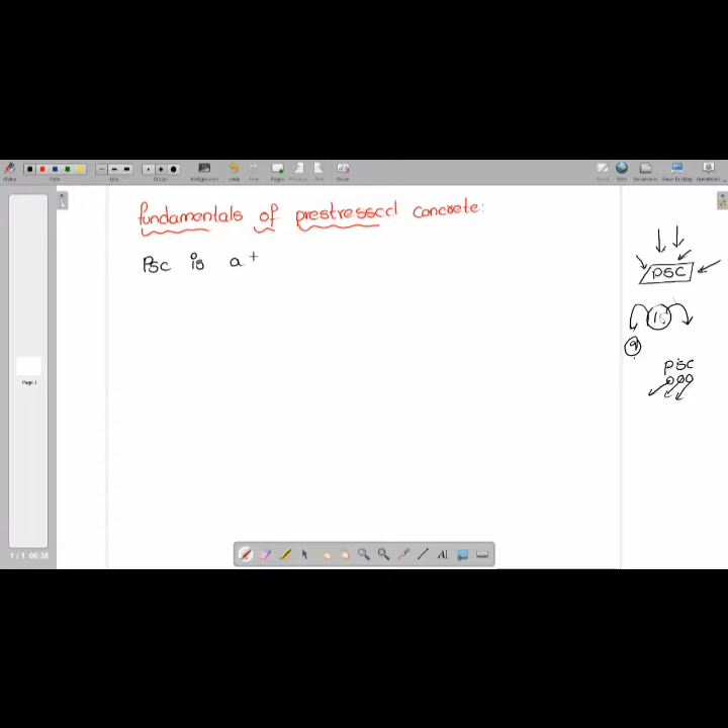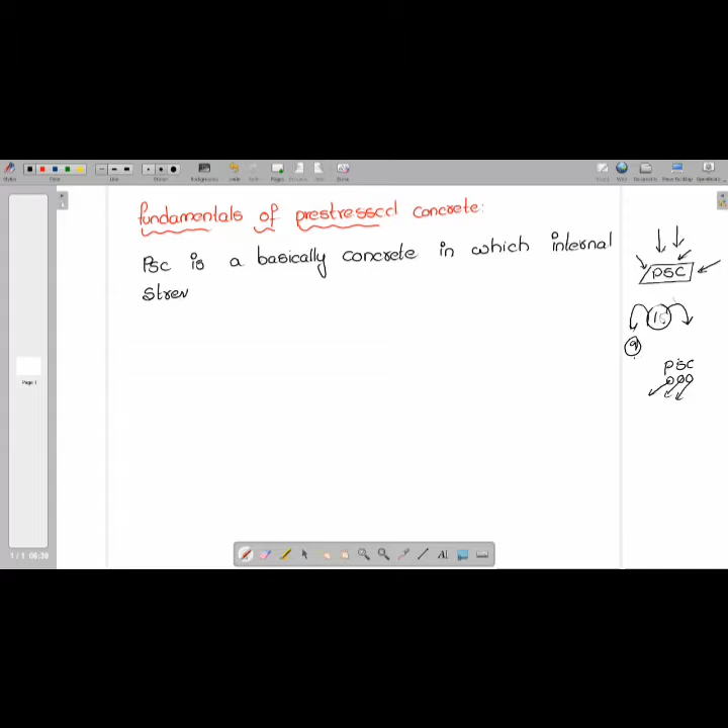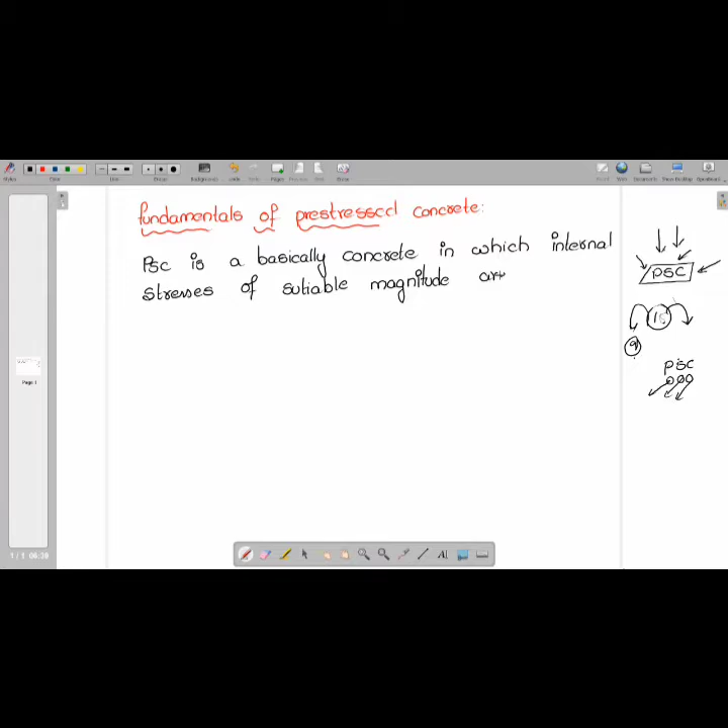Are you clear, students? So what is pre-stressed concrete? PSC means pre-stressed concrete. Pre-stressed concrete is basically a concrete in which internal stresses of suitable magnitude are intentionally introduced.

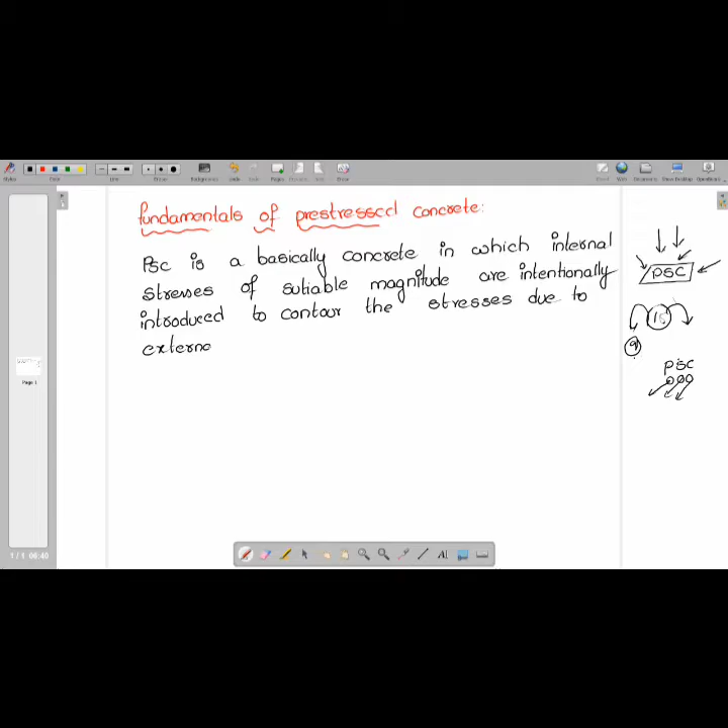To counter the stresses due to external loads, up to a desired extent. Is this clear, my dear students? So what I would like to tell you is: pre-stressed concrete is basically a concrete in which internal stresses of suitable magnitude are intentionally introduced to counter the stresses due to external load up to a desired extent.

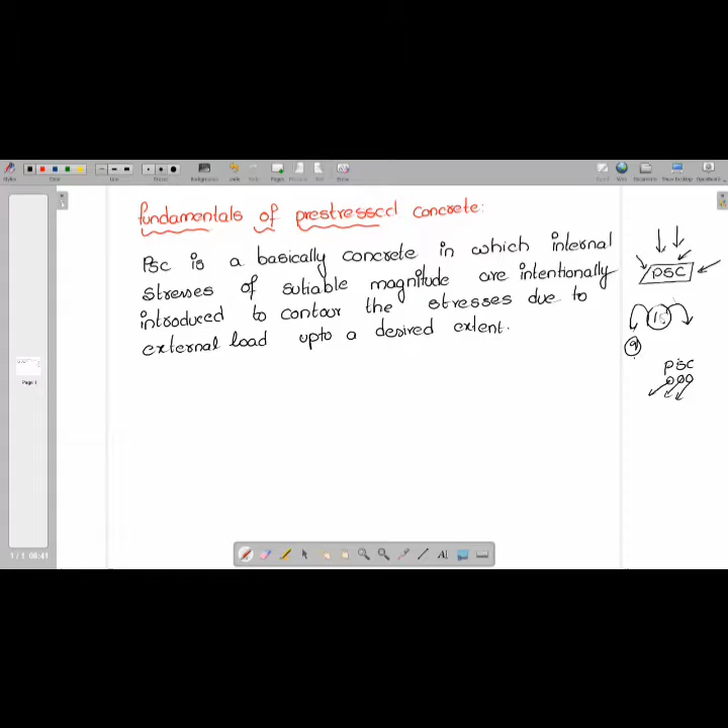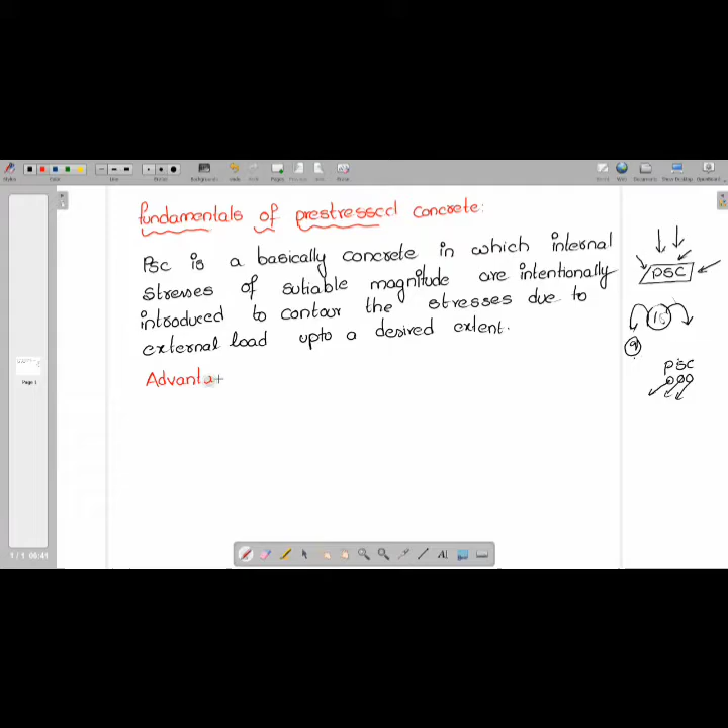Okay, suppose, students, in RCC steel plays a passive role, but in pre-stressed concrete, now immediately you will ask me. First of all, we'll discuss what are the advantages of pre-stressed concrete.

What are the advantages of pre-stressed concrete, sir? The first advantage of pre-stressed concrete is: cross section is more efficiently used in fully pre-stressed members.

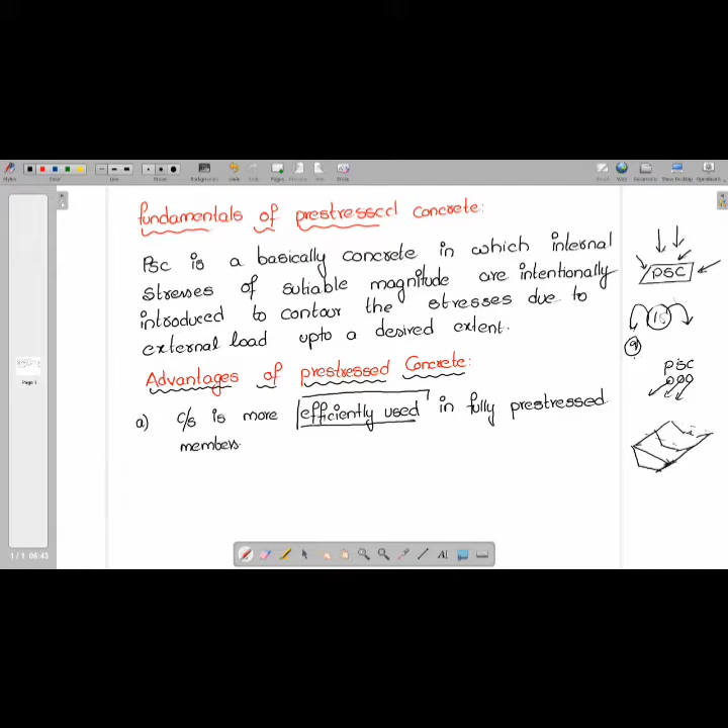I'll tell you how it is. Suppose you want to go on a bridge. The length of the bridge is fixed, so whatever the girder length, you stick to that length only. That is the reason the cross section is more efficiently used here. Suppose this is what you have to provide, but instead, if you provide up to this, then what will happen? Obviously, load will increase.

So when you are using efficient section, dead loads will also be reduced considerably. Dead loads are reduced considerably.

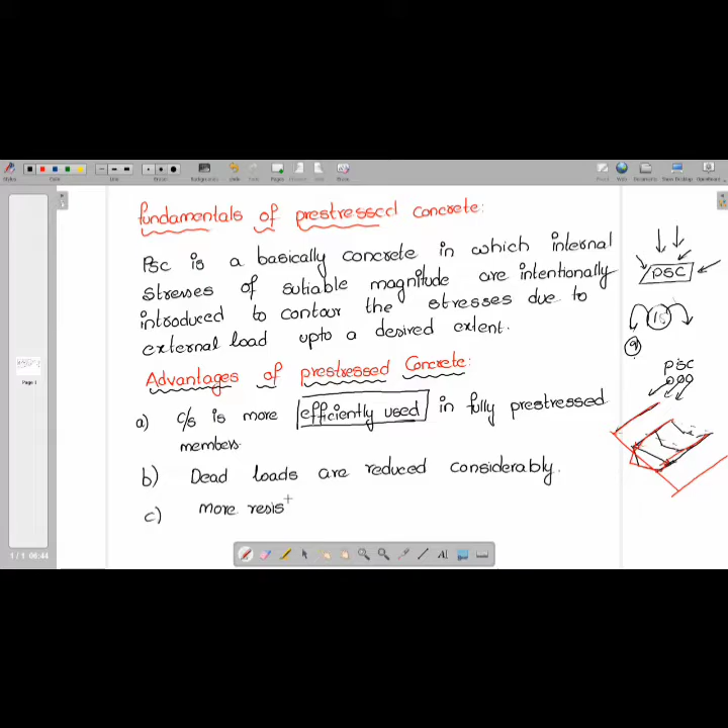Pre-stressed concrete is more resistant to impact and vibrational loading.

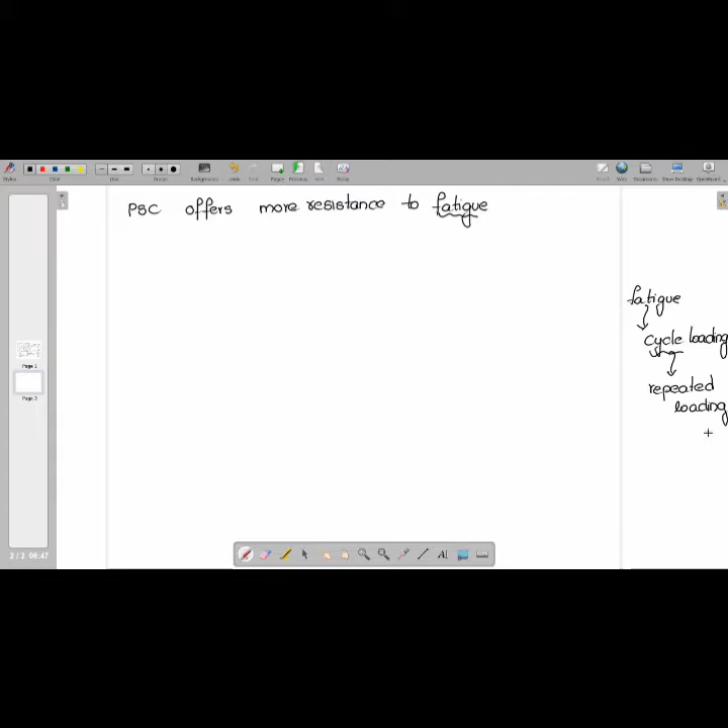So pre-stressed concrete offers more resistance to fatigue or repeated loading. In case of cyclic or repeated loading, if there is a generator in a cellar, then it is called repeated loading. Any machine loading is nothing but a repeated loading. Clear, students?

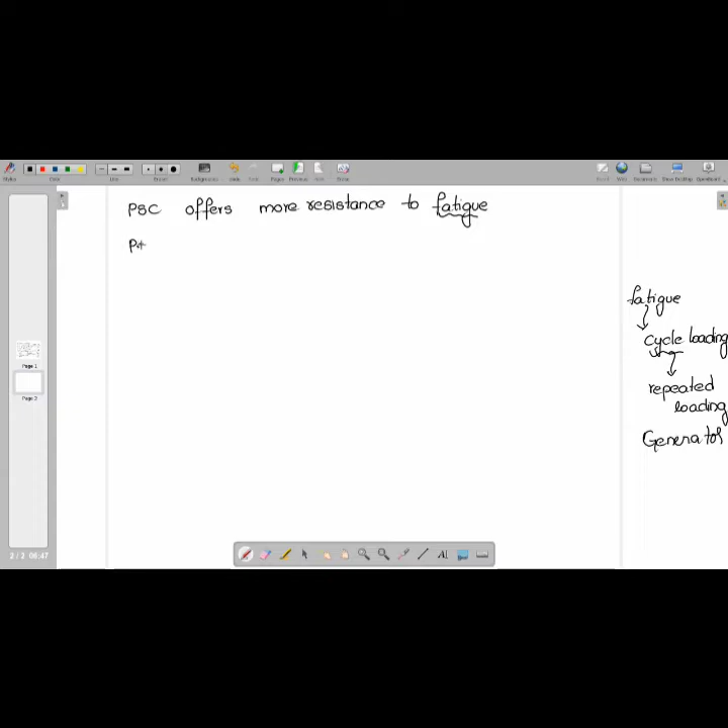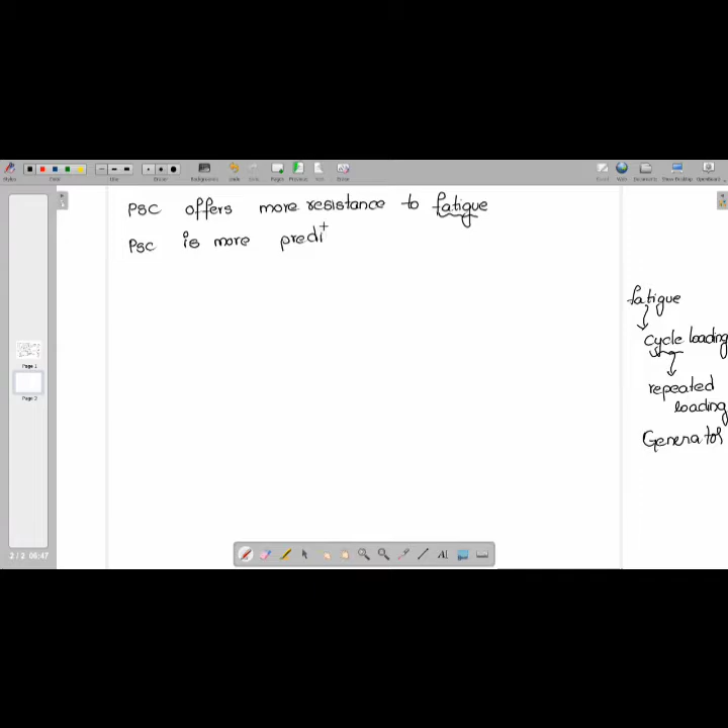Is it clear? Next one: pre-stressed concrete is more predictable, meaning when it is going to fail or show any sign of failure, pre-stressed concrete is more predictable compared to reinforced cement concrete (RCC).

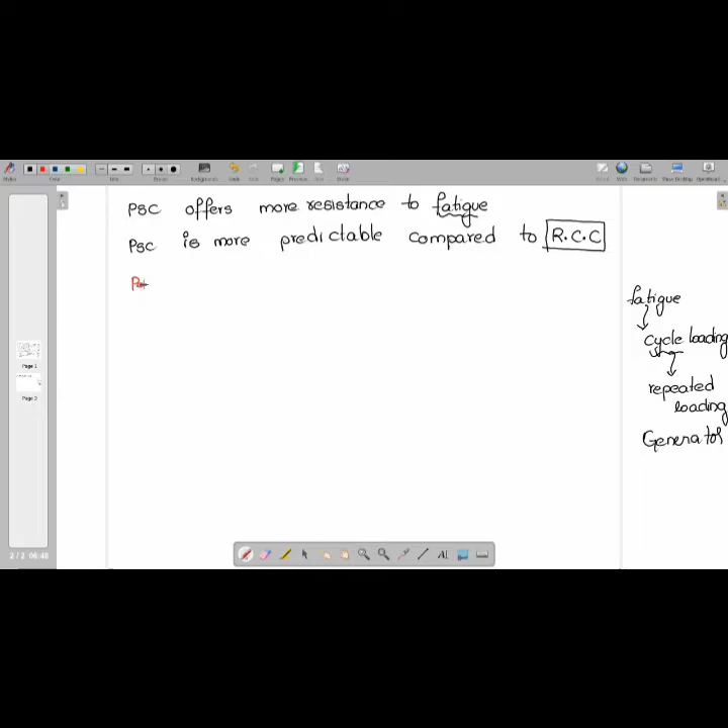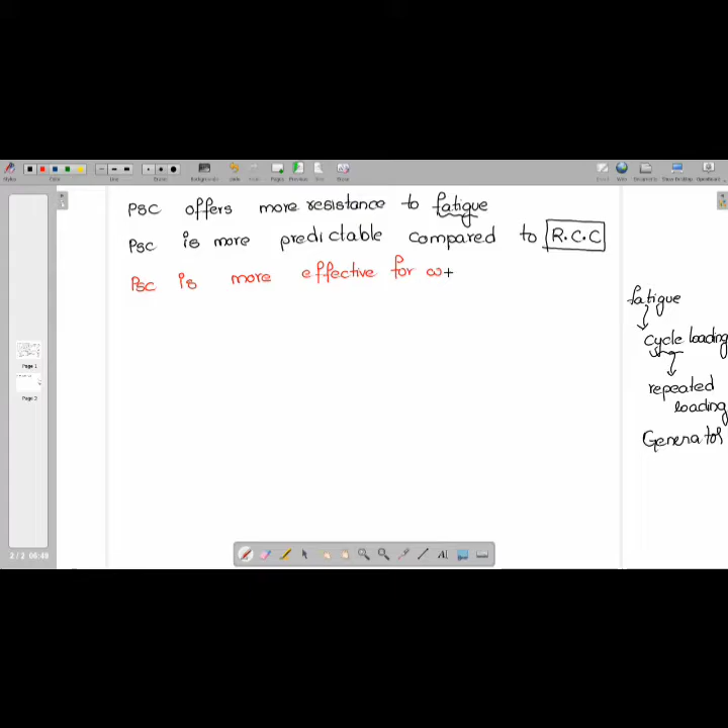And remember, students, pre-stressed concrete is most effective in water retaining structures. Water retaining structures mean hydraulic dams, circular water tanks, or any hydraulic structures. Pre-stressed concrete is more effective for water retaining structures.

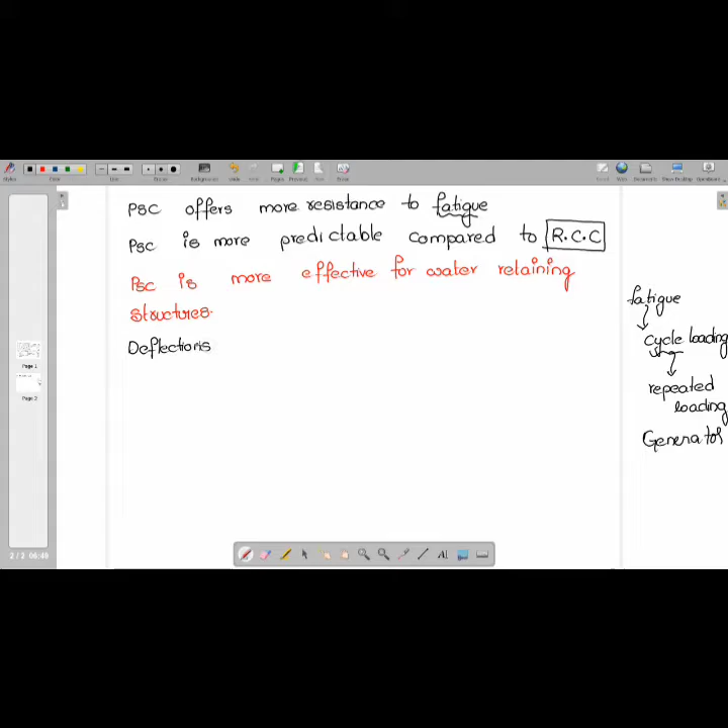And remember, deflections are less in pre-stressed concrete. It is more effective for water retaining structures, and deflections are less. Hence it is more stiffer.

So what are the advantages of pre-stressed concrete? The cross section is most efficiently used. Dead loads are reduced considerably. It offers more resistance to impact and vibration loading. It has more resistance to fatigue loading. Pre-stressed concrete is more predictable compared to RCC. It is more effective for water retaining structures, and deflections are less in pre-stressed concrete.

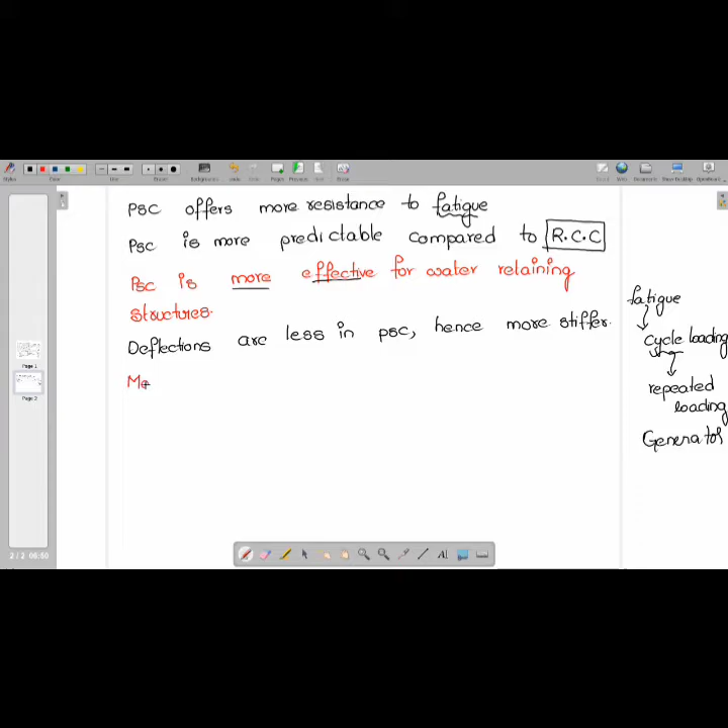Okay, now what are the materials used in pre-stressed concrete? Sir, see, the materials used in pre-stressed concrete are...

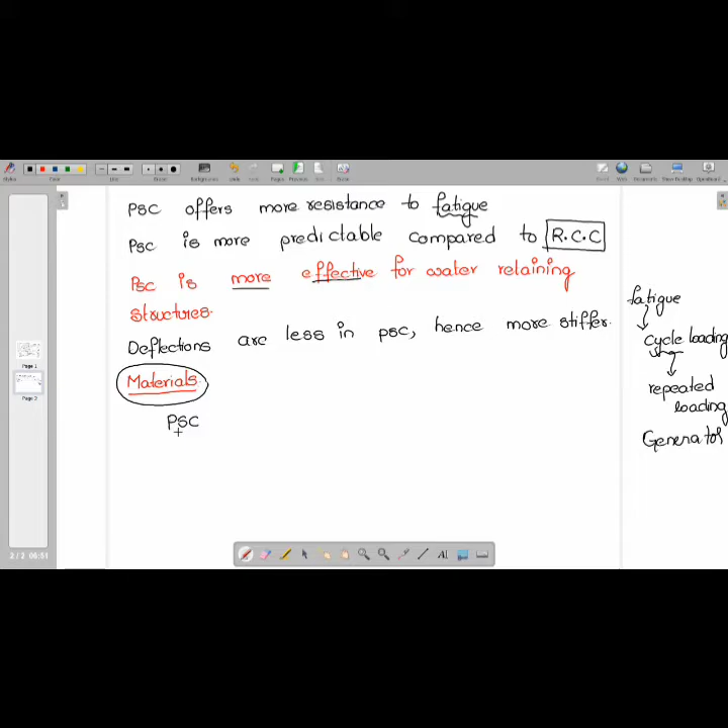The materials used in pre-stressed concrete include the minimum grade of concrete. The minimum grade of concrete for pre-tensioning is M40. Very, very important, sir, you can write this down.

And for post-tension it is M30 only. So the minimum grade of concrete for pre-tensioning is M40, and for post-tension is M30. Sir, why is it more in pre-tension and less in post-tension? I'll explain that while discussing the procedure of pre-tensioning. For now, just remember these values.

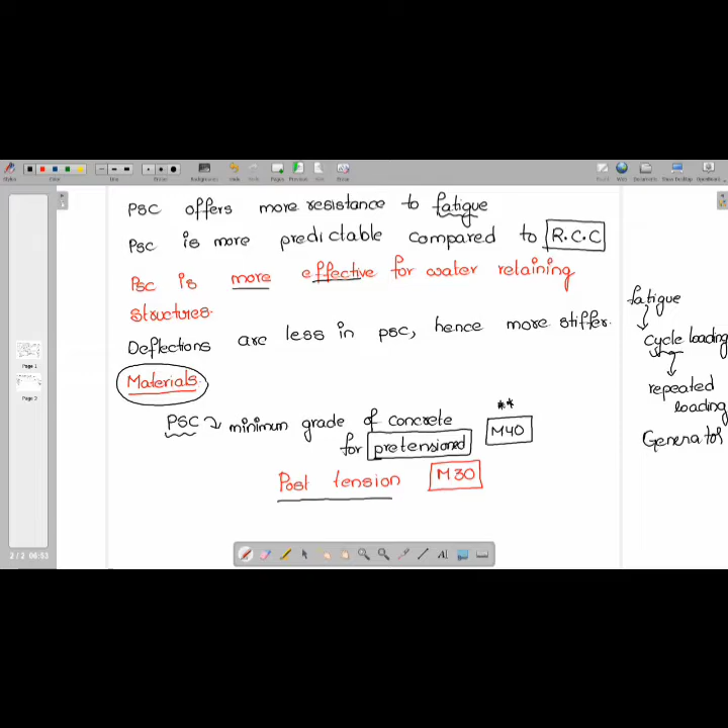Next, the maximum cement content is not more than 530 kg per meter cube. Suppose in RCC, this value is 450 kg per meter cube. Actually, this maximum cement content depends upon exposure conditions as well as the water-cement ratio.

Now see students, in pre-stressed concrete we use high strength steel. So let us see how this steel is used and what are the properties of the steel.

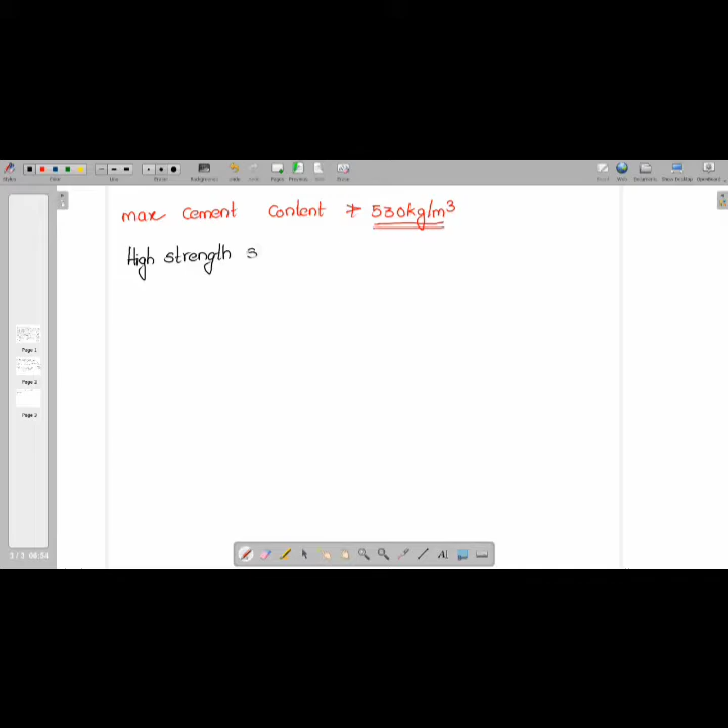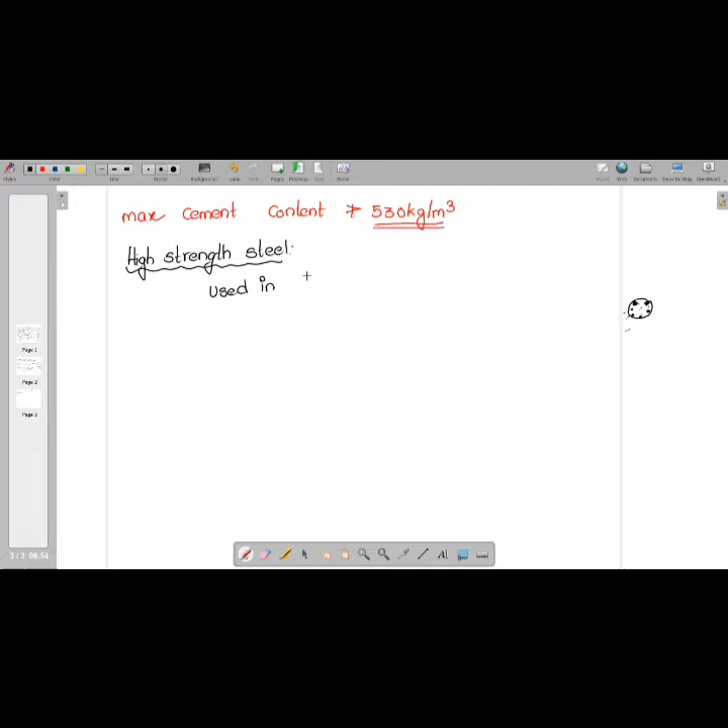Sir, how this steel is used is, suppose this steel is used in the form of, if you see olden days, a cable wire. If you are watching digital TV, we used to have a cable TV. Or if you see a telephone connection, if you cut the wire, it used to have wires like this. How the high strength steel is used is, either it is used in the form of wires, cables, or bars.

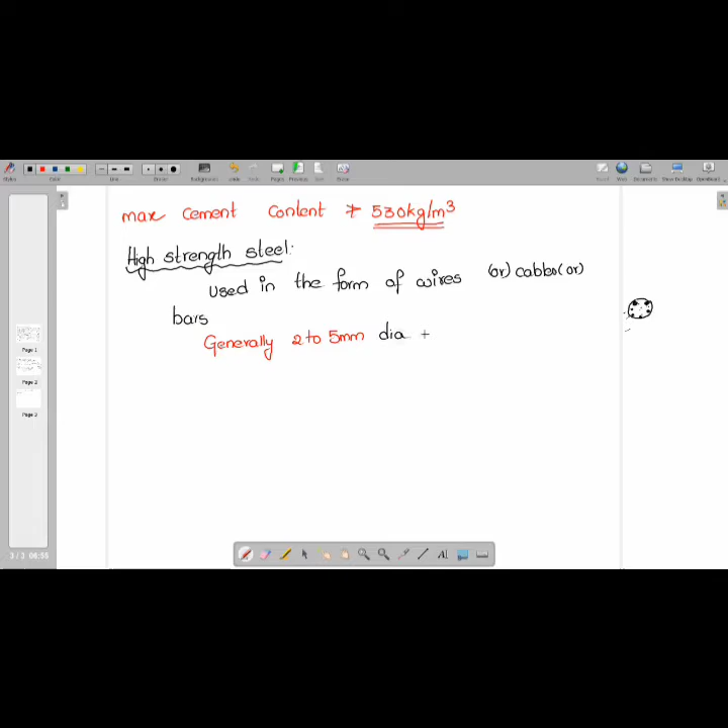Now see, students, generally 2 to 5 dia wires are used.

Now see, in pre-stressed concrete, bars of 10 to 32 are used.

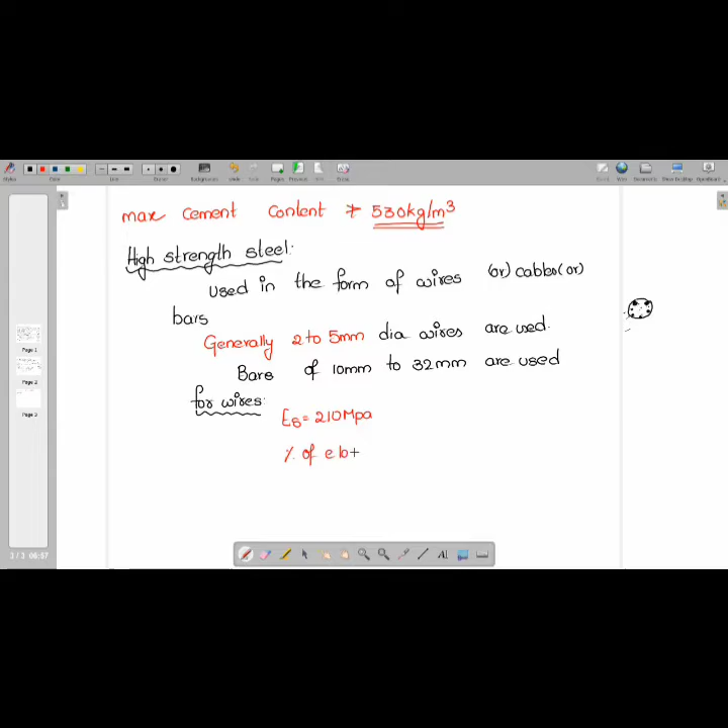If you consider for wires, the Young's modulus of steel is 210 MPa, and the percentage of elongation is 2.5 to 4%.

This is for wires. The same thing if you see here, for bars we can see. If I consider for bars, the Young's modulus of steel for bars is 200 MPa, and percentage of elongation is 10%.

Now in steel, what are the different compositions we have is, first one is carbon. Usually carbon should contain 0.7 to 0.8%, and this will impart strength to steel.

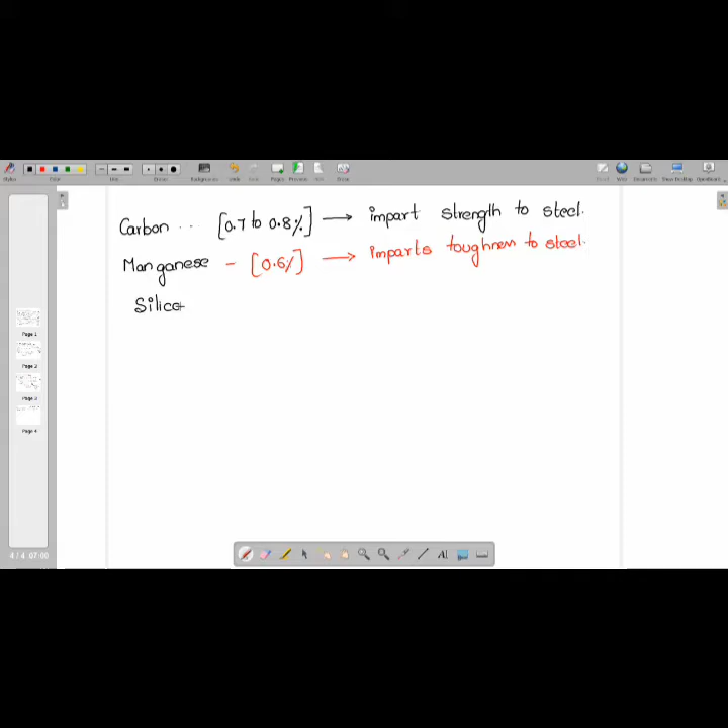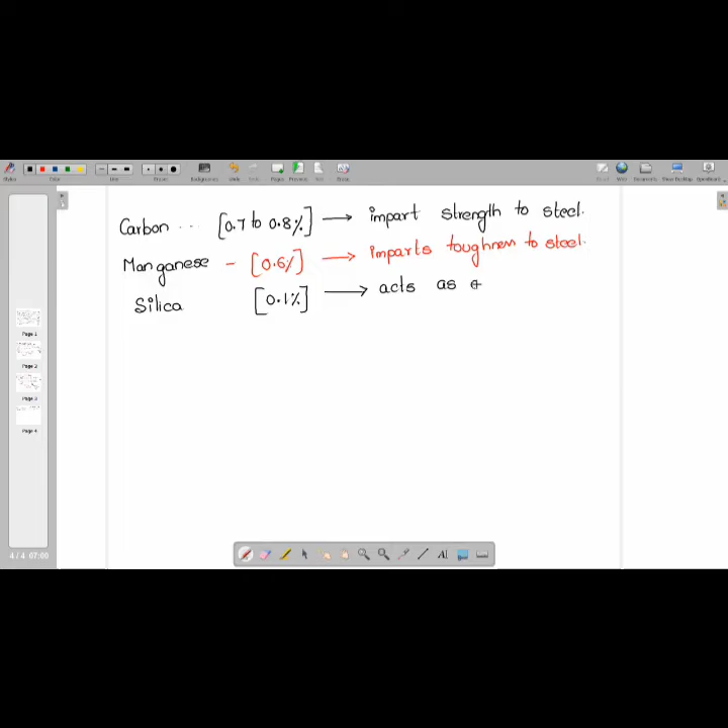Next, silica is 0.1 percentile, and this will act as a flux.

And if I consider sulfur here, it will be 0.05 percentile, and excess of sulfur will cause corrosion. So here, carbon will impart strength to steel, manganese imparts toughness to steel, silica acts as a flux, and excess sulfur causes corrosion.

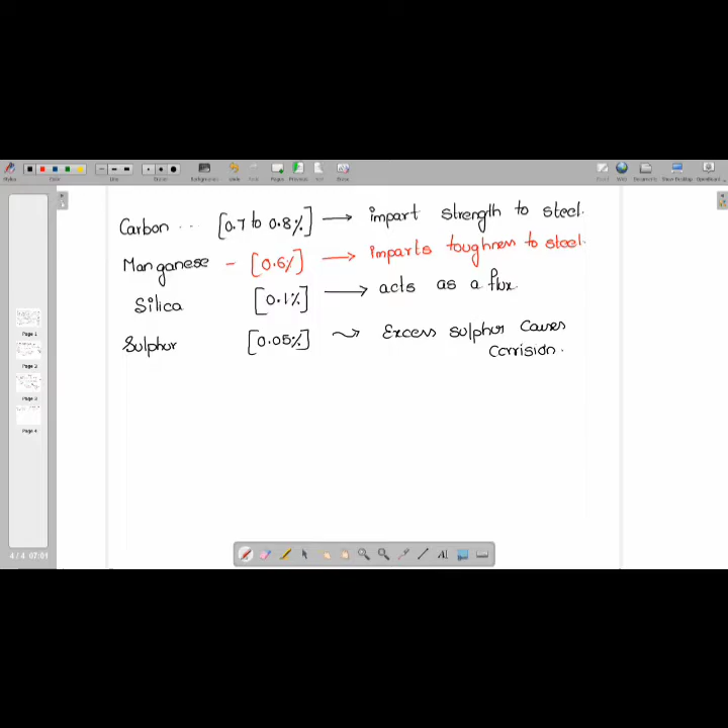What is the necessity of using high strength steel and high strength concrete? Any idea, students? What is the necessity of using high strength steel and high strength concrete in pre-stressed concrete? Why the necessity of high strength steel and concrete? Can anyone tell me the reason, sir? Why are they using high strength steel and high strength concrete? It provides high bond stress.

Okay, still. Okay, sir.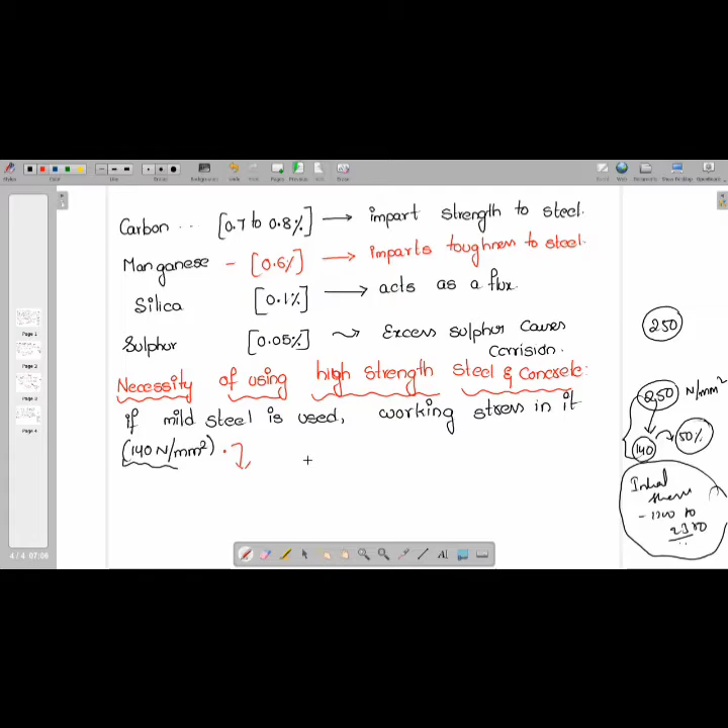Why? Because if mild steel is used, the working stress is 140 Newton per mm square. What I would like to tell you is, as I told you students, initially it should have high stresses. How much should the initial high stresses be? It should be around 1200 to 2350 Newton per mm square.

Here it should be how much, sir? 1200 to 2350 Newton per mm square. Are you getting me? Initially the high stresses should be around 1200 to 2350 Newton per mm square. How can this be achieved? This can be achieved only by high strength steel.

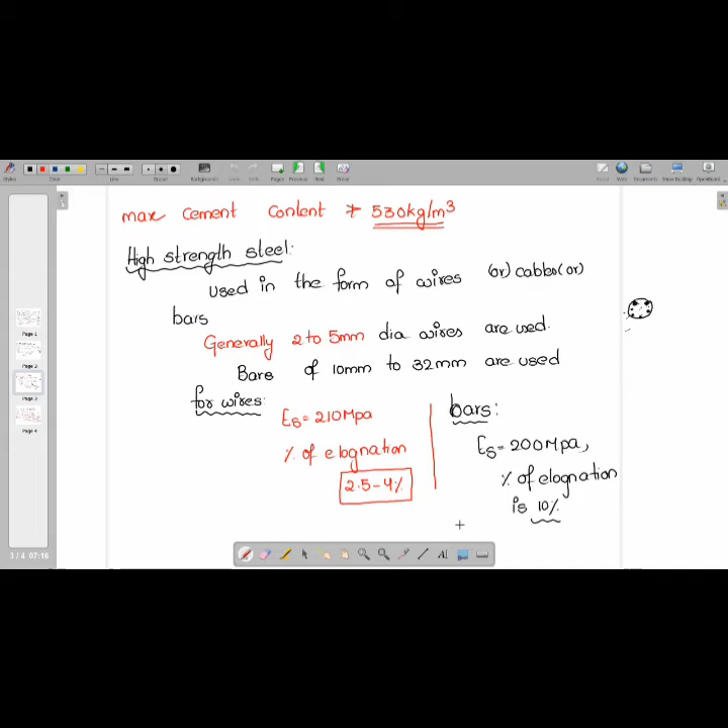Now, why are we using high strength concrete? Why we are using high strength concrete is it offers high resistance to shear, bond, and tension. Or you can say it offers resistance to tension and shear.

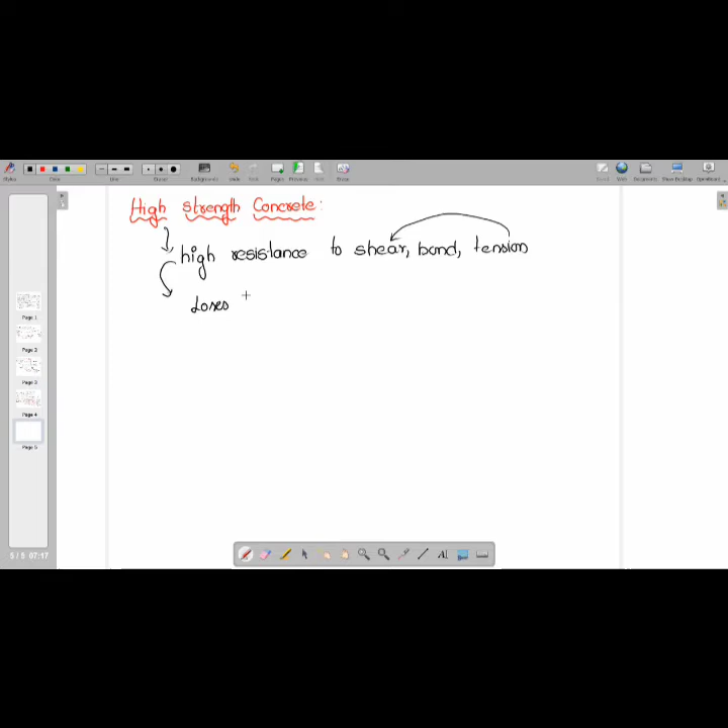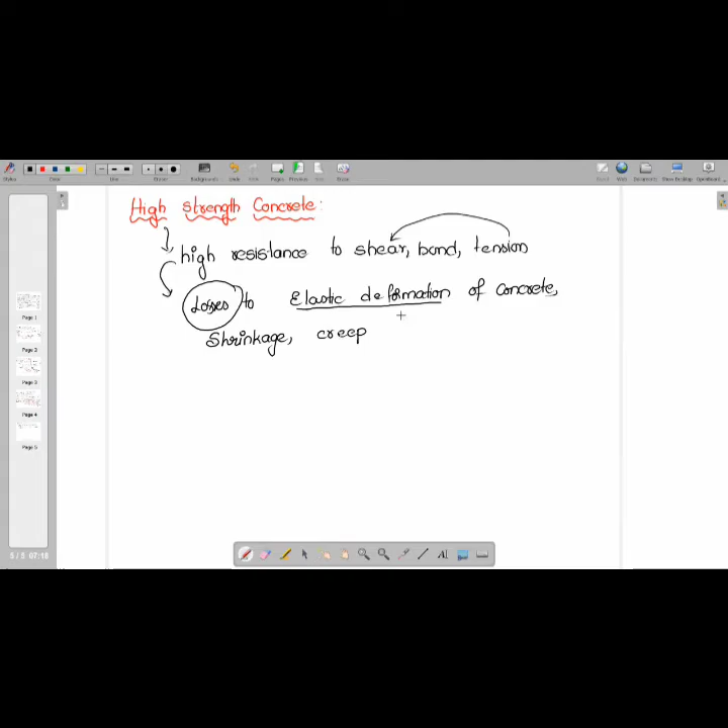Now see, actually if you use low strength concrete, there will be losses. There will be a loss due to elastic deformation of concrete. I will be discussing losses separately; losses are a separate chapter. There can be a loss due to elastic deformation, shrinkage, or creep. That is the reason we are using high strength concrete.

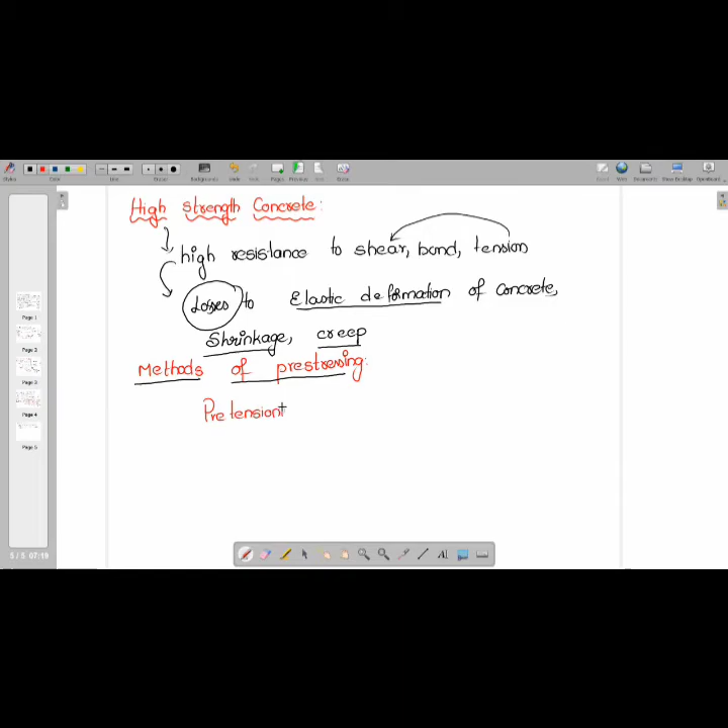Now see students, we have different methods of pre-stressing. What are the methods of pre-stressing? Can anyone tell me? The different methods of pre-stressing are: one is pre-tensioning, another one is post-tensioning. What you will do in pre-tensioning and what you will do in post-tensioning, we'll discuss individually.

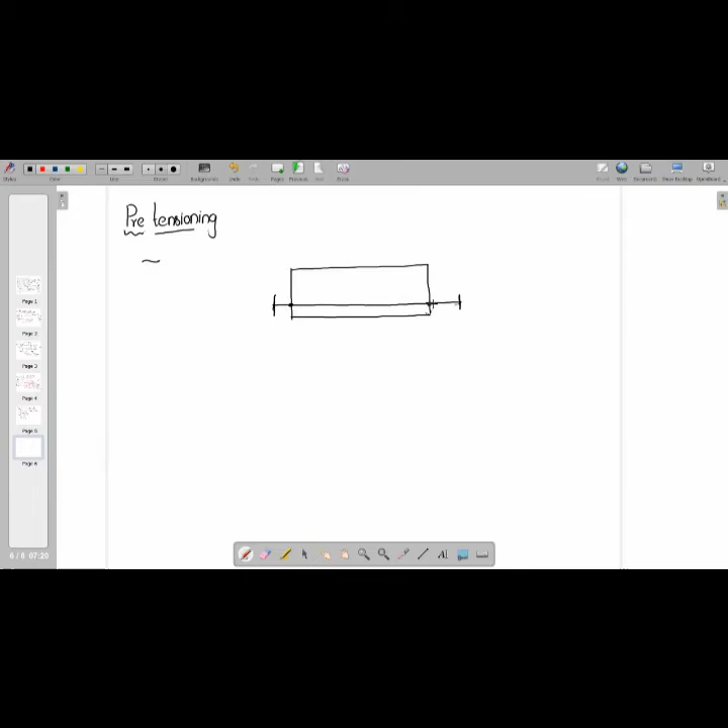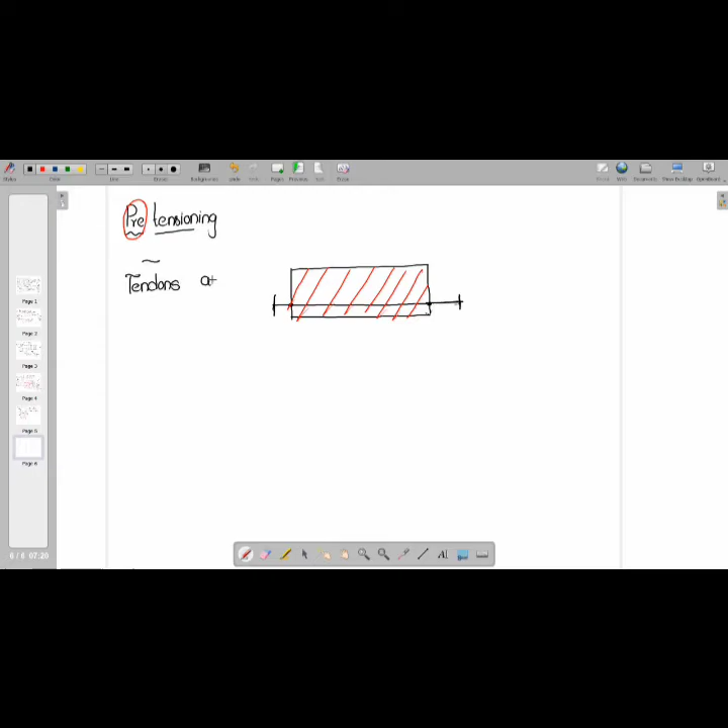Okay, what do you mean by pre-tensioning? In the name itself, it is pre-tension. Pre means before. See students, if you consider this is a tendon, these tendons are tensioned first, and after that you will do the casting of concrete. So here you can write: tendons are tensioned before casting of concrete.

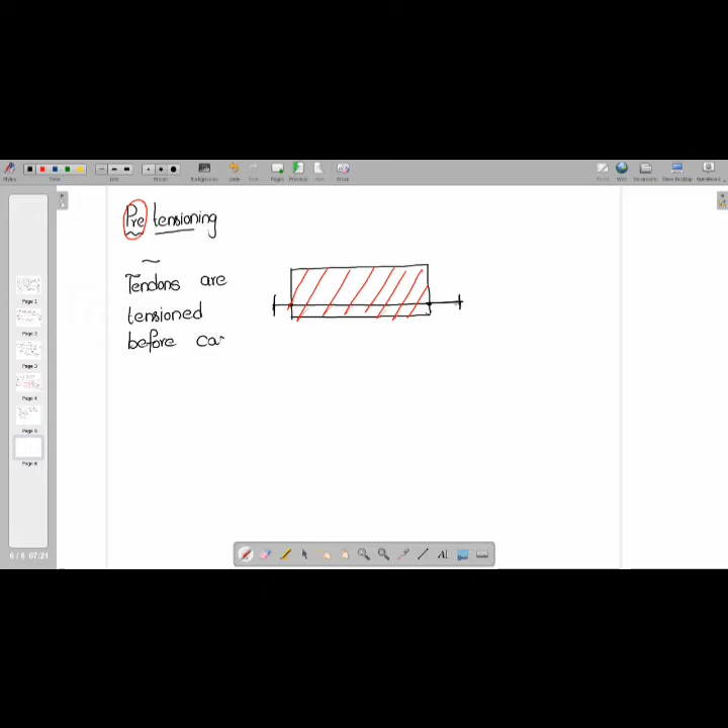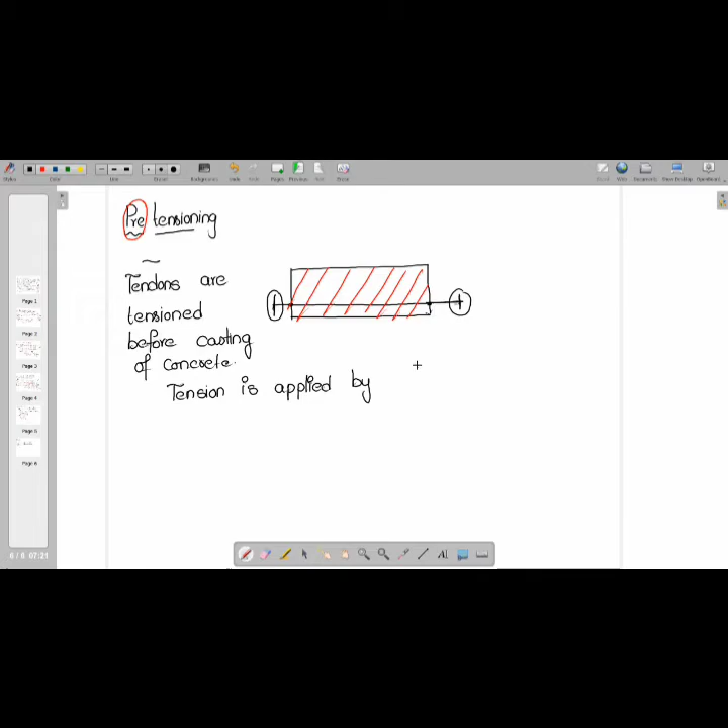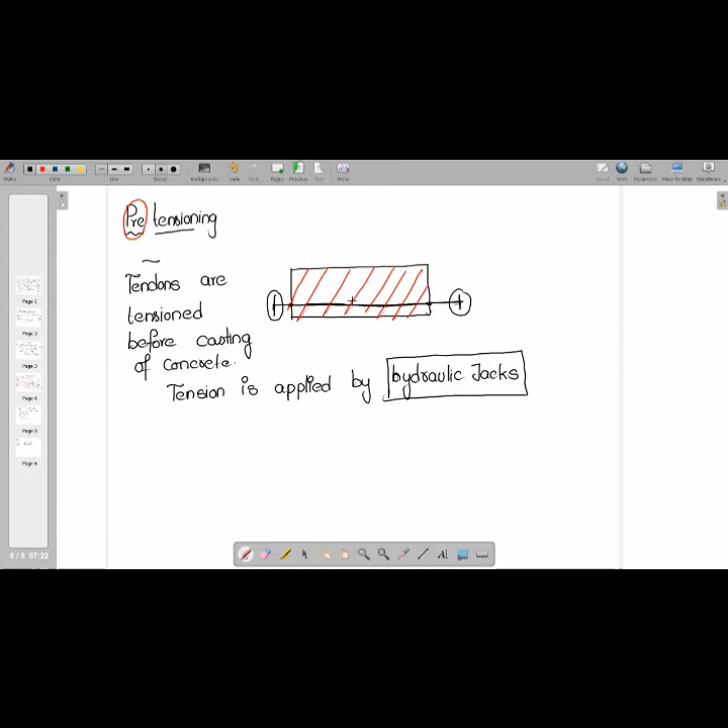Now see students, how this tension is applied. This tension is applied by hydraulic jacks. Here you can write: tension is applied by what, sir? Tension is applied by hydraulic jacks. Clear, sir? How is the tension applied? The tension is applied by hydraulic jacks.

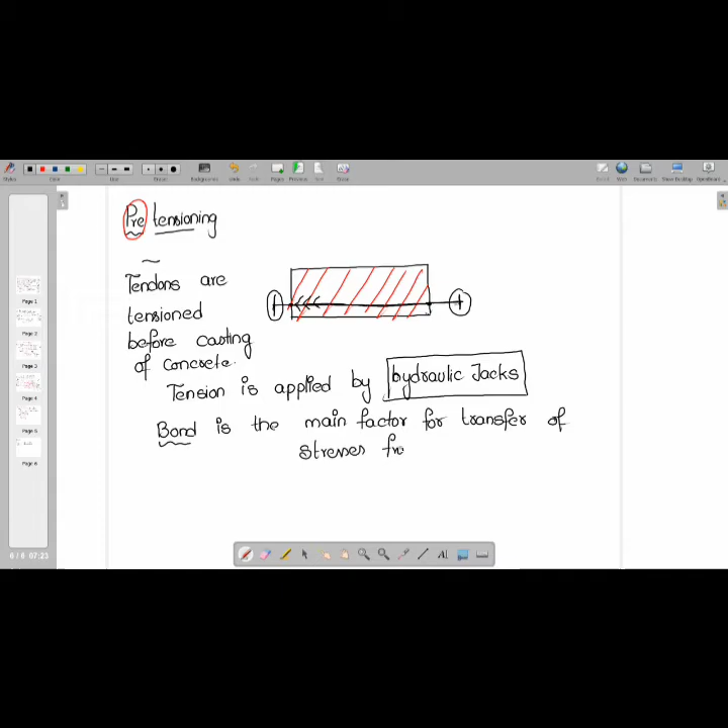Now, see, students, immediately Rohit will ask me, sir, where do you use this or how is this used? See, students, how are the stresses in steel and concrete transferred? Remember here, bond is the main factor. You can write here: bond is the main factor for transfer of stresses from steel to concrete.

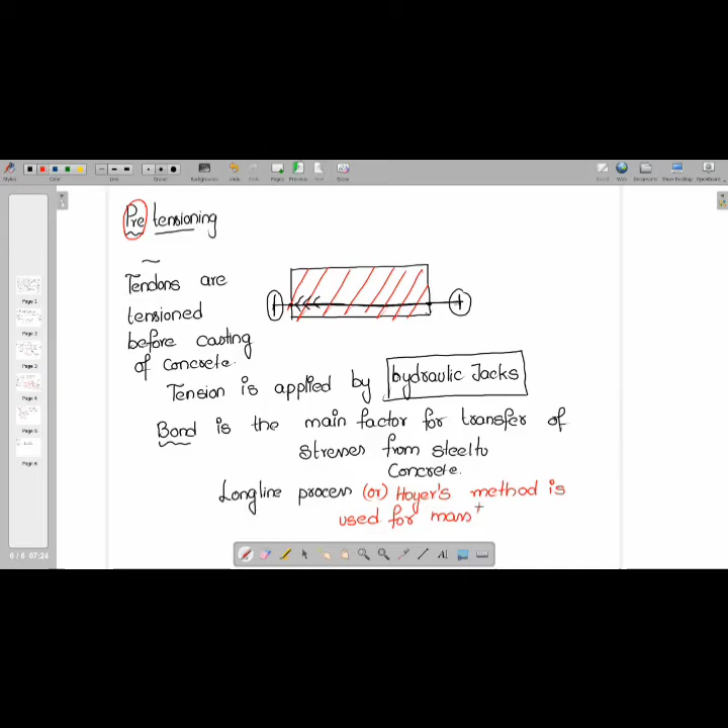Now see students, you can write here: long line process or Hoyer's method. Long line process or Hoyer's method is useful for mass production, mass means bulk production or huge in number.

Now immediately you will ask me, sir, what are tendons? Very good. What is a tendon? A tendon is a group of wires tied together. A tendon is nothing but a group of wires tied together. Are you getting it, Vijay?

So here, the long line process is useful for mass production. Now see, I'll tell you. Suppose, students, we have a steel wire. This steel wire will be tensioned with a hydraulic jack. Now you will do casting of concrete and you will break it here. This is one concrete block. Again you will do another casting of concrete like this and break it.

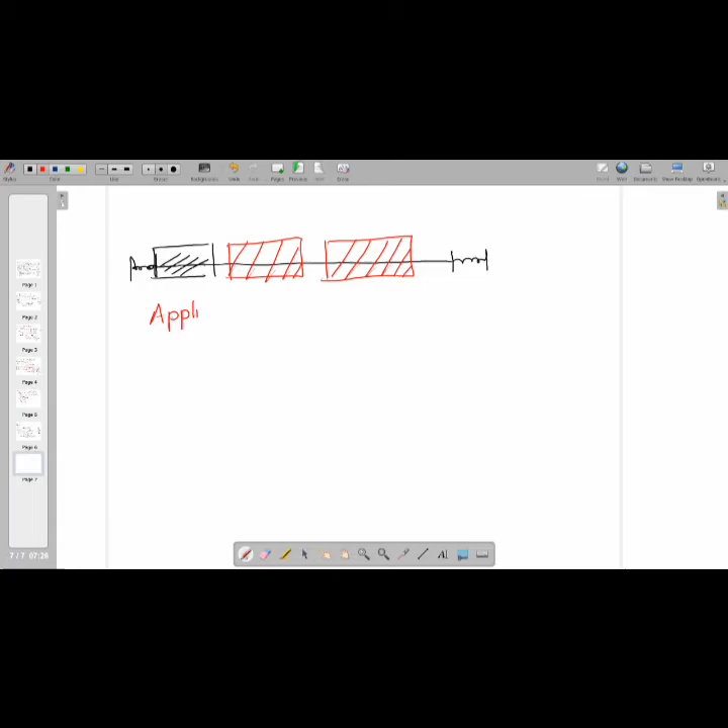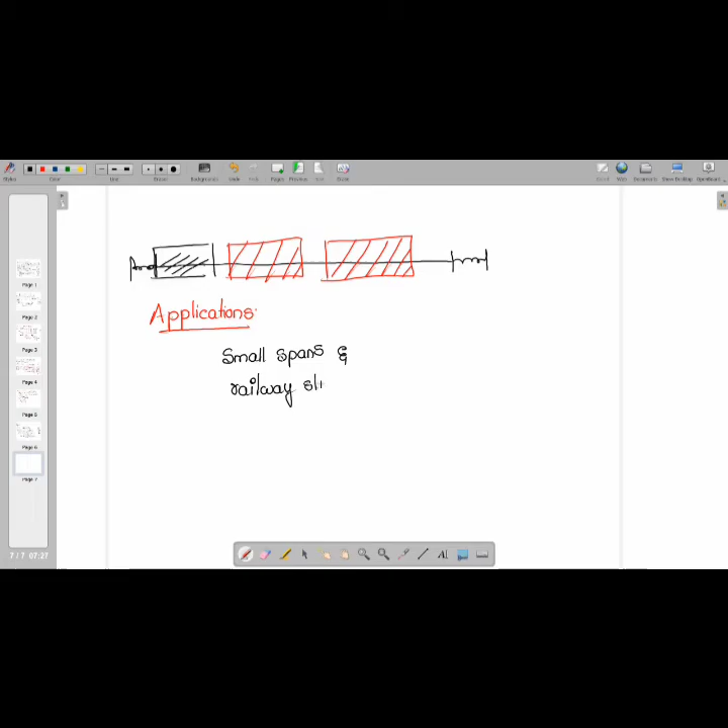So what are the applications of pre-tensioned concrete? It is useful for small spans and also for railway sleepers. So the applications are small spans and railway sleepers.

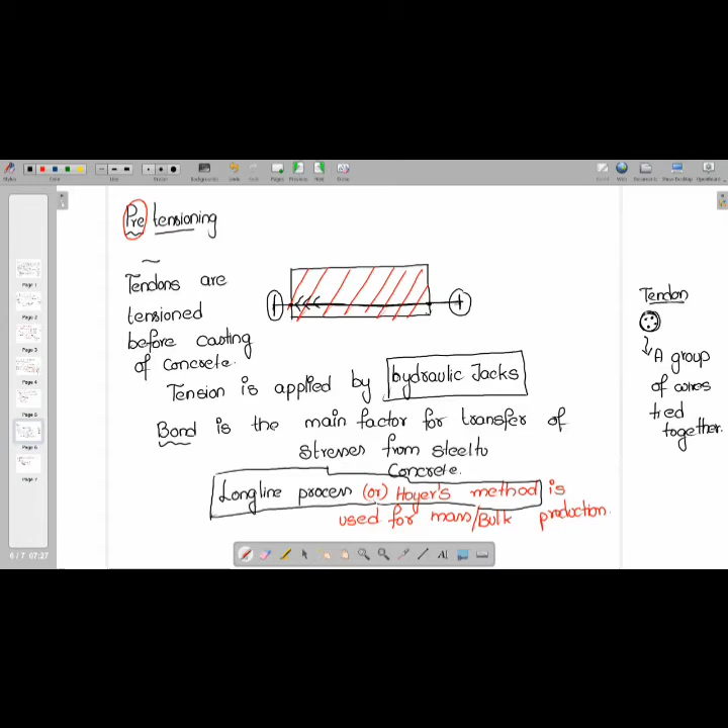So please understand, students, pre-tensioning means tendons are tensioned before casting of concrete. Tension is applied by hydraulic jacks. Bond is the main factor for transfer of stresses. They can ask you which of the following is a method of pre-tensioning. So you can write that the long line process or Hoyer's method is the process of pre-tensioning. Where do you use pre-tensioning? For small spans as well as railway sleepers.

Do you know what railway sleepers are? This is a railway track. In a railway track, you will find these kinds of concrete blocks. These concrete blocks are nothing but the railway sleepers. Clear? Any doubts in these, students?

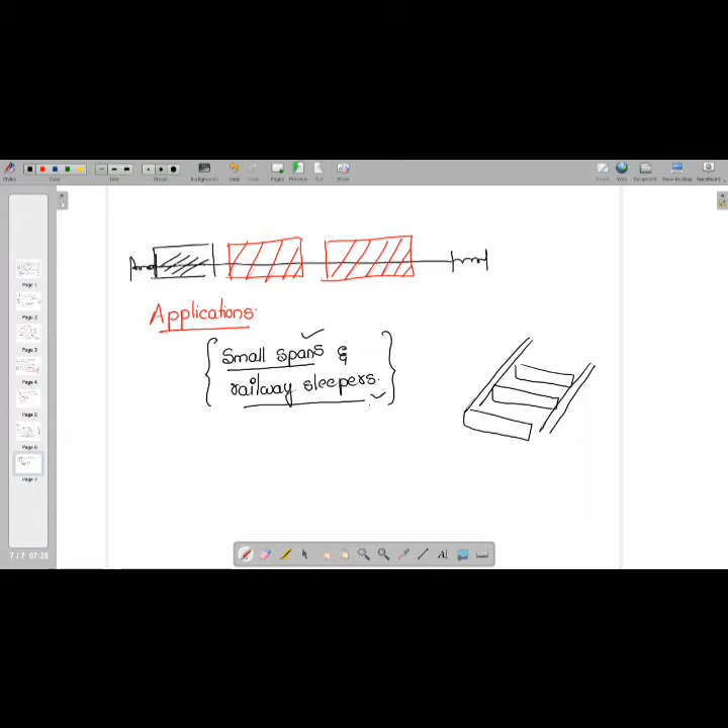Next, we would like to discuss the post-tensioning system. See, students, what actually is post-tensioning? I'll tell you. Suppose I consider this as a girder. In this girder you will have ducts.

So here in the post tensioning, you will have ducts. In these ducts, what you will do is you will introduce the steel bar, okay, and you will tension these steel bars. After tensioning this, the space between them is grouted like this. Are you getting, my dear students?

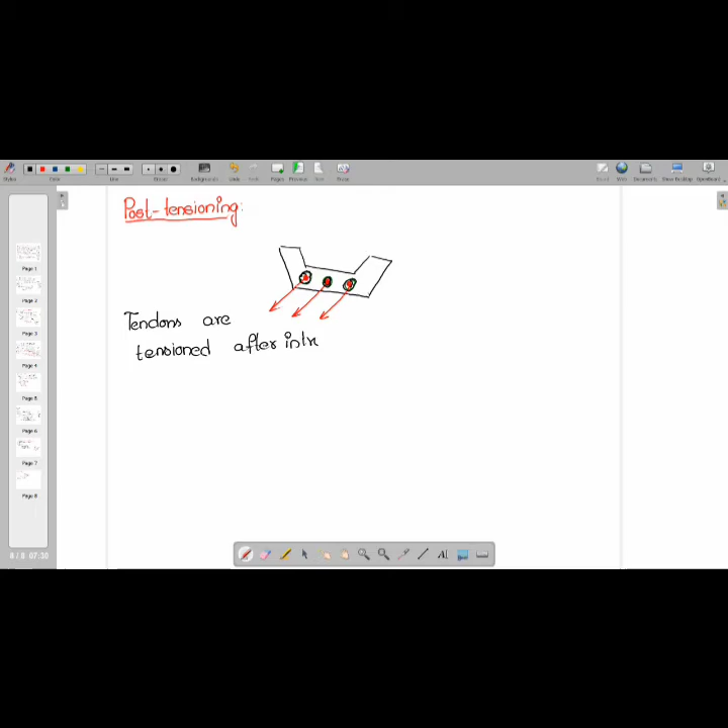Now see, students, here you can say tendons are tensioned after introducing into the ducts. Tendons are introduced into the duct and after that they will be tensioned, okay.

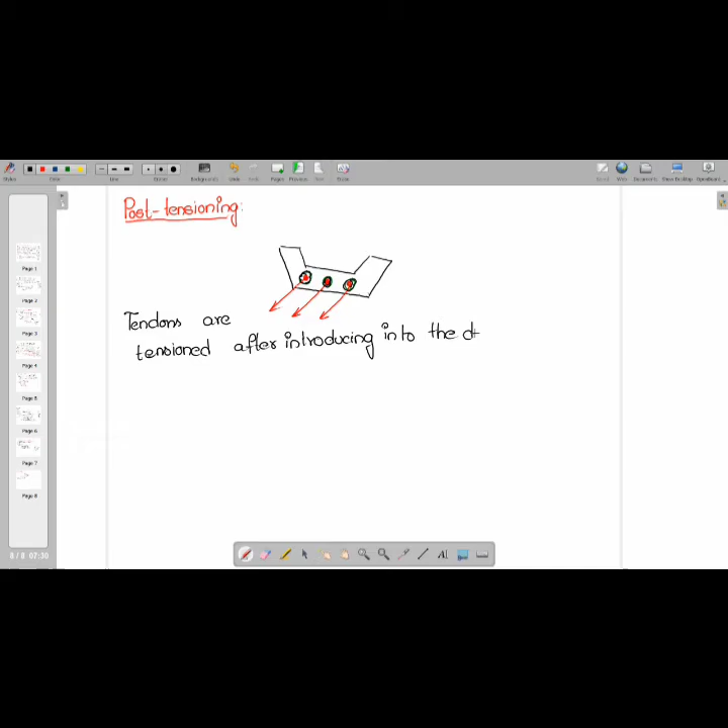Now see, students, you can see how this transfer of stresses will happen. If you have another duct here, like this, they are connected by end bearing. See here, students, I told you bond is the main factor for transfer of stresses, right? Similarly here, if you have two pipes like this, how are they connected? They clamp, right? Like this.

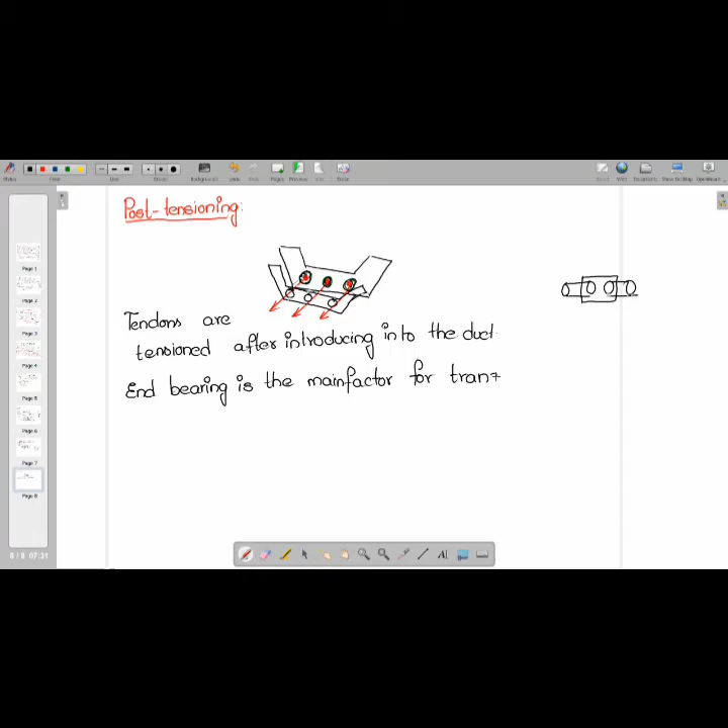So here you can write end bearing is the main factor for transfer of stresses in steel and concrete. Clear, student? Now see, student, we call the hole as duct.

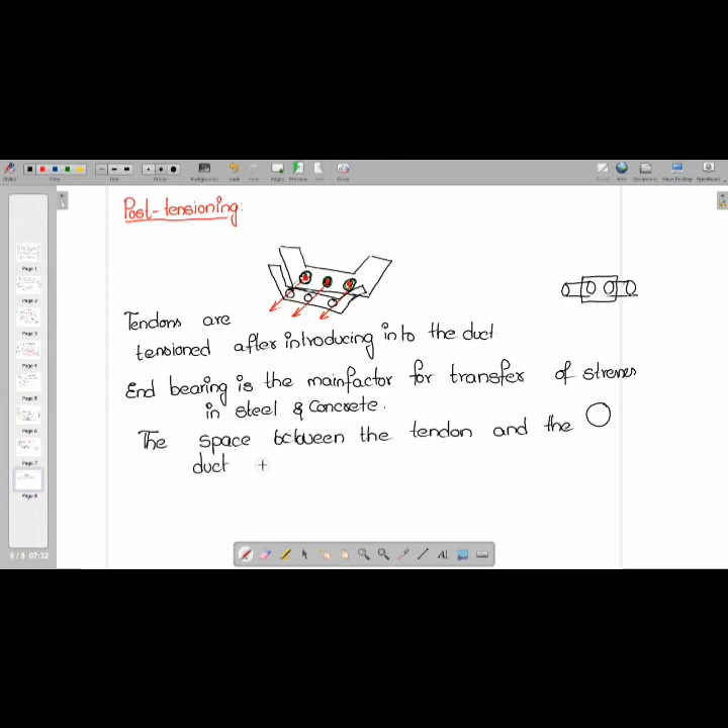The space between the tendon and the duct is generally grouted.

And here you can write which systems are used in post tensioning: Magnel system, or you might have heard this, there is a separate company also, a very multinational company in prestressed concrete. Freyssinet system, Magnel system, or you can say Gifford-Udall system. Why I'm telling the names is they can ask you which of the following is a pre-tensioning system and which is a post-tensioning system.

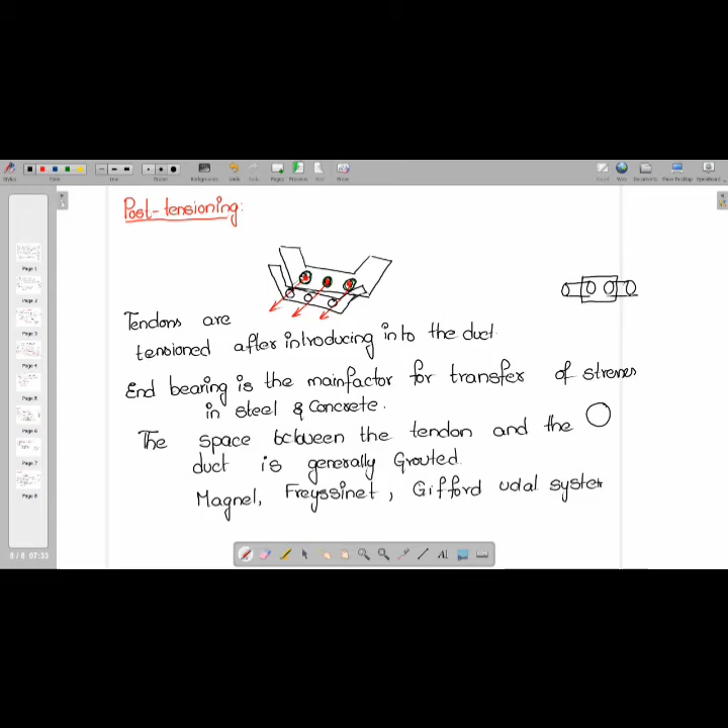So Magnel, Freyssinet, all these are based on wedge action. Wedge means what, sir? Some inclined weight. So Magnel or Freyssinet or Gifford-Udall system is based on wedge action. And there is another system also, the most common system: Lee-McCall system.

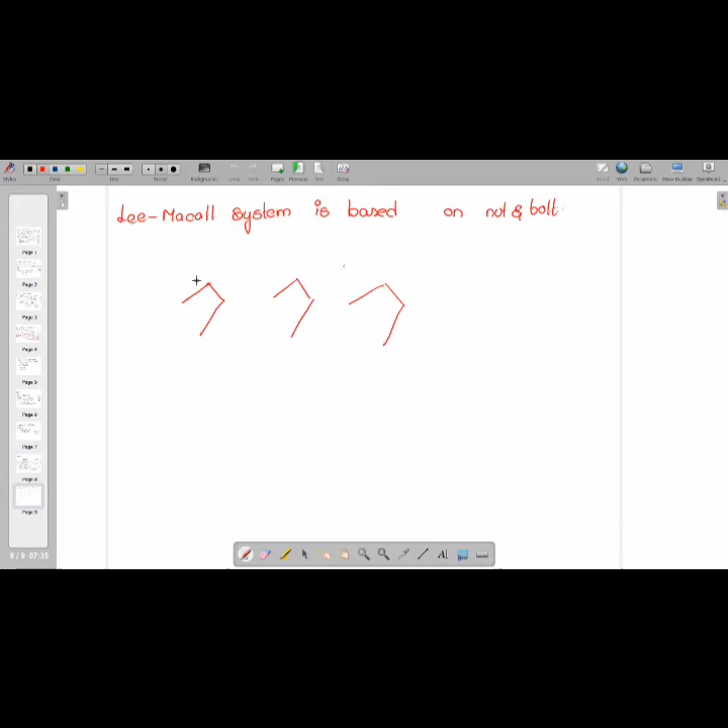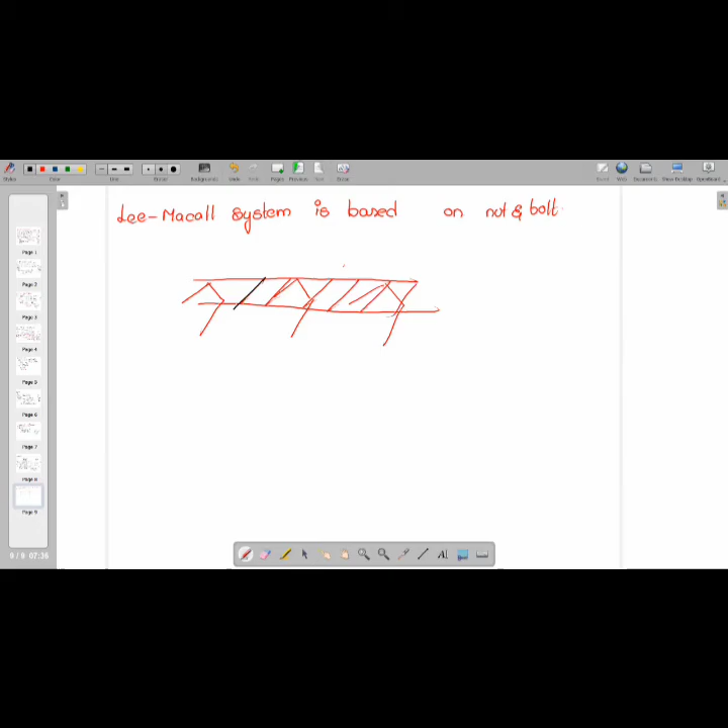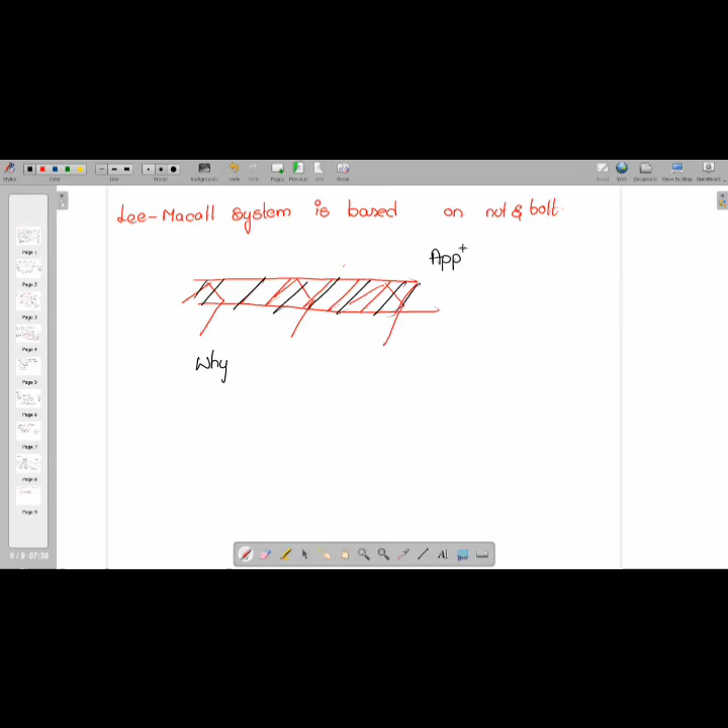Now can you tell me the application here? Application for post tensioning is you can write long span bridges. You can use post tensioning for long spans.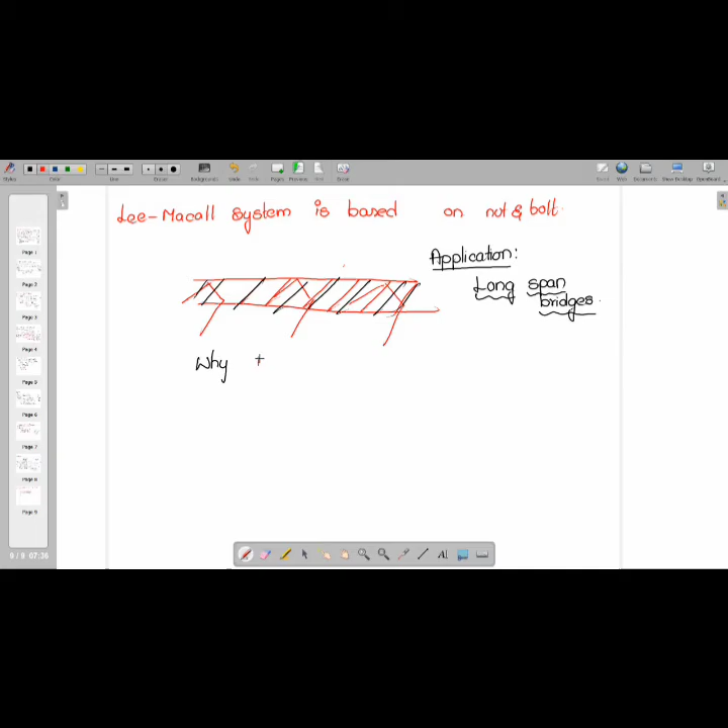Now I have a question for all of you students. Why are we using M40 in pre-tensioning? Now you are aware what is pre-tensioning and post-tensioning, so why are we using M30 in post-tensioning? Can you tell me now? Just think practically. Why are we using M40 in pre-tensioning and M30 in post-tensioning?

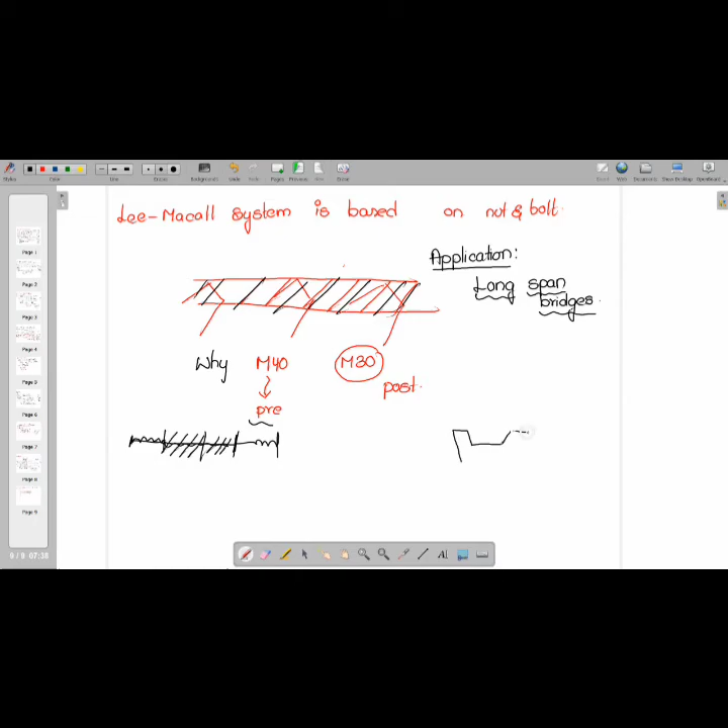Anyone in the class? Okay, let me explain. See students, in pre-tensioning, first the wire is tensioned. First the wire is tensioned by hydraulic jacks. Suppose if there is any error in the wire, then what you can do is increase the concrete strength. But in post-tensioning, first the concreting is done. If there is any problem, you can slightly increase the grade of steel. So that is one of the reasons why the grade of concrete is more in pre-tensioning and less in post-tensioning.

Are you getting me? See, in pre-tensioning, first the steel is subjected to stresses. So after that, if there is any error, then only the concrete strength can be increased. But in post-tensioning, first you will do concreting. So if there is any error in concrete, you can increase the steel. So that is the reason it is lesser. Clear, students? Is the reason clear for everyone?

I am telling you, suppose you have used Fe 415 grade of steel. I am talking about pre-tension. Suppose I have tensioned the steel wires with hydraulic jacks, but you feel that the strength is slightly lesser, then what will you do? You will manipulate that strength with high strength concrete.

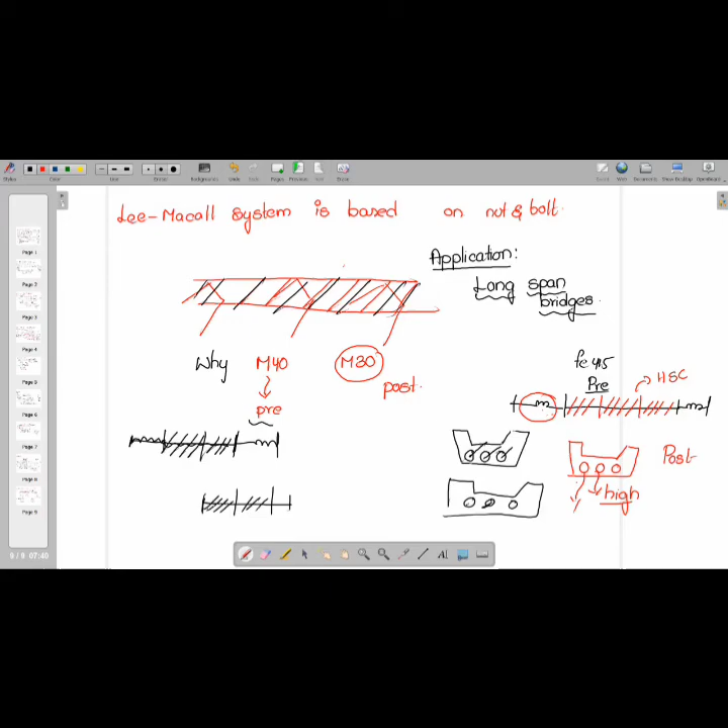Suppose you have used a lesser grade of concrete in post-tension, but you want to increase the strength slightly, then use a high grade of steel. In pre-tension, you cannot play with steel because it is already tensioned. In post-tension, you can play with steel. That is the reason it is lesser. Clear? Simran, Nasir, is it clear? In pre, you cannot do anything with the steel, that is the reason for higher grade concrete. In post, you can play with steel, that is the reason for lesser grade.

Now see, this is a straightaway question in HPSC as well as JKSSB. What is the code for pre-stressed concrete? The code used for pre-stressed concrete is IS 1343.

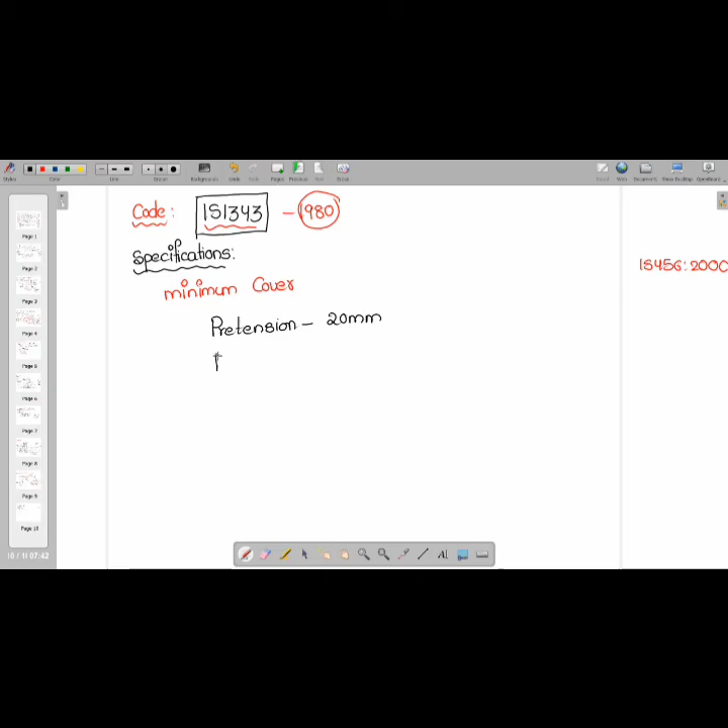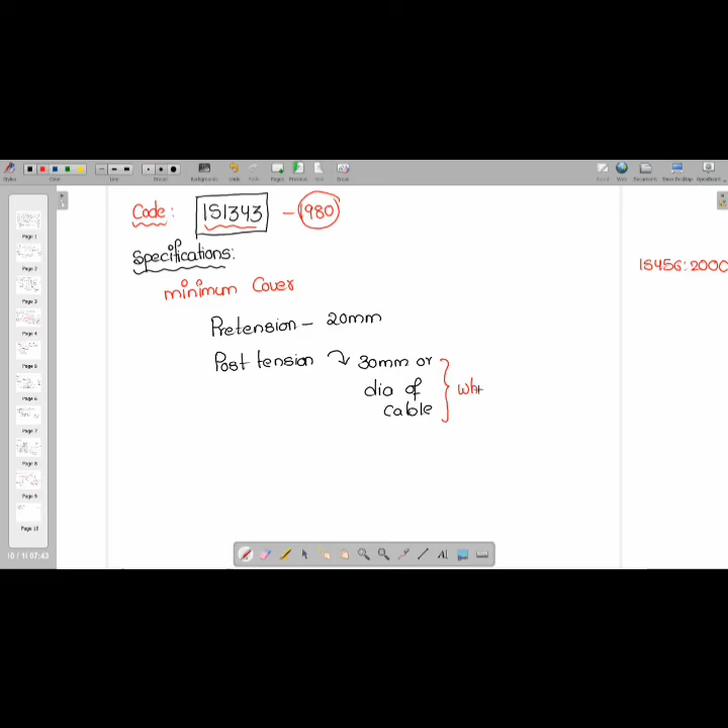If you see the minimum cover, in pre-tension the minimum cover is 20 mm. In post-tension, the minimum cover is 30 mm or the dia of cable, whichever is greater. In pre-tension it is 20 mm, and in post-tension it is 30 mm or dia of cable, whichever is greater.

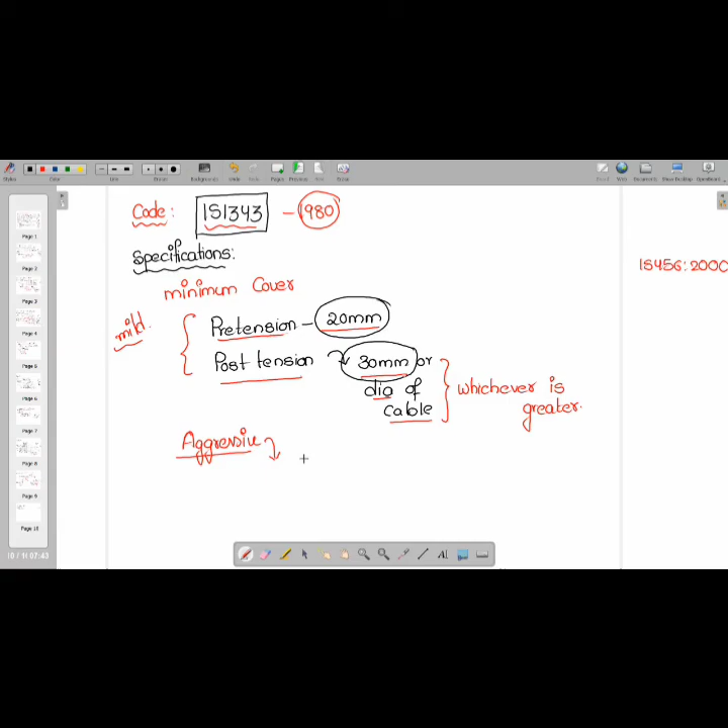Now see students, in case of aggressive environments. What are aggressive environments? All these values are in case of mild exposure. But in case of aggressive environments, like a sea coast or marine exposure where the steel gets corroded easily, these cover values will be increased by 10 mm. Values will be increased by what? 10 mm.

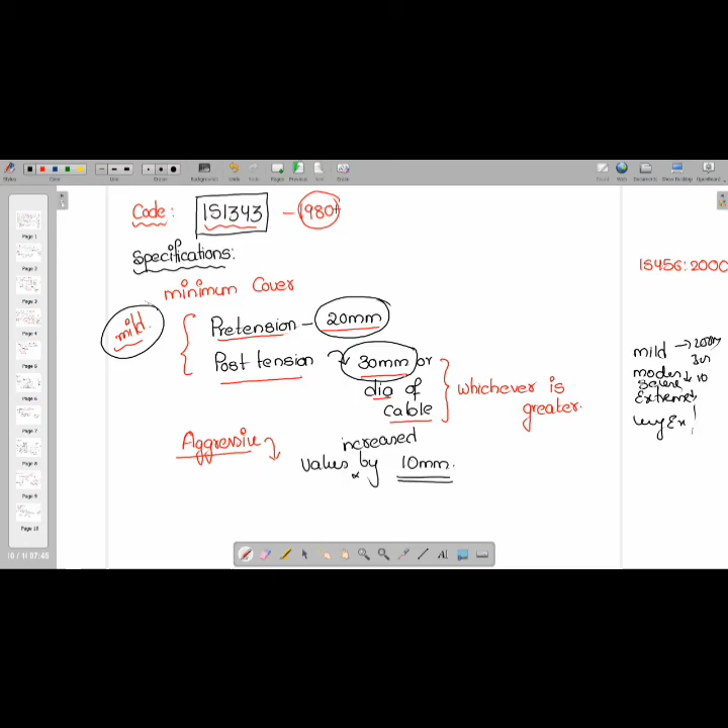Now the next one: I would like to talk about the spacing of cables or bars. When I talk about spacing of cables or bars, in case of single wires, what should be the spacing?

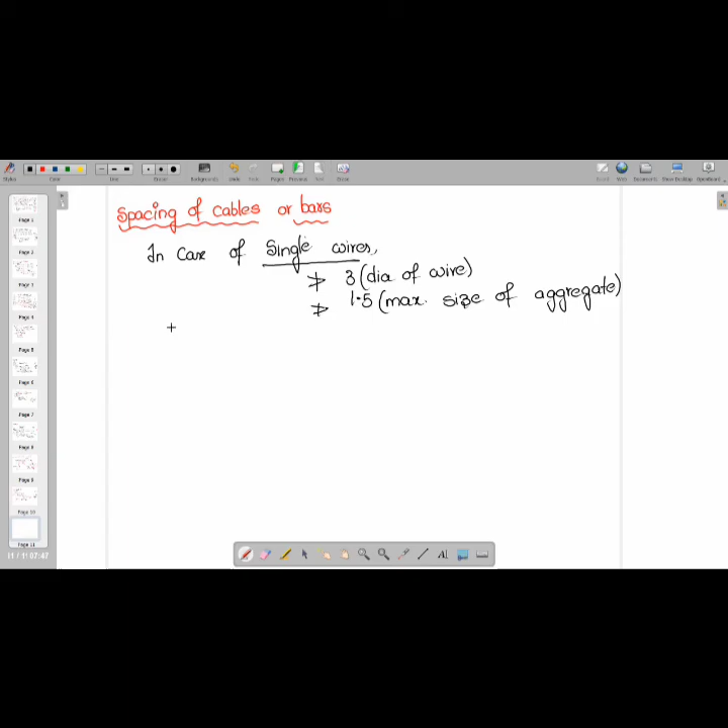If you talk in case of cables or large bars,

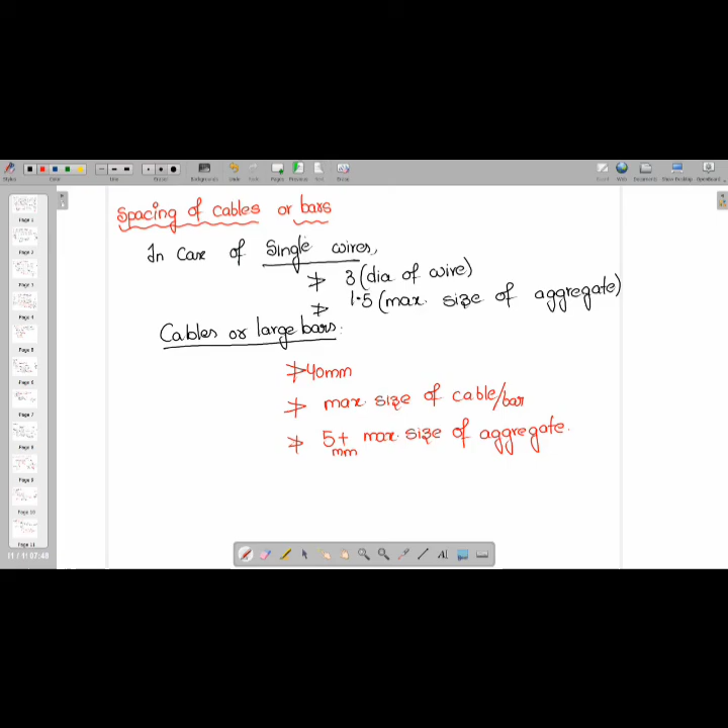Should not be greater than means it should be the lesser value. See, students, usually for spacing the lesser value only will be provided.

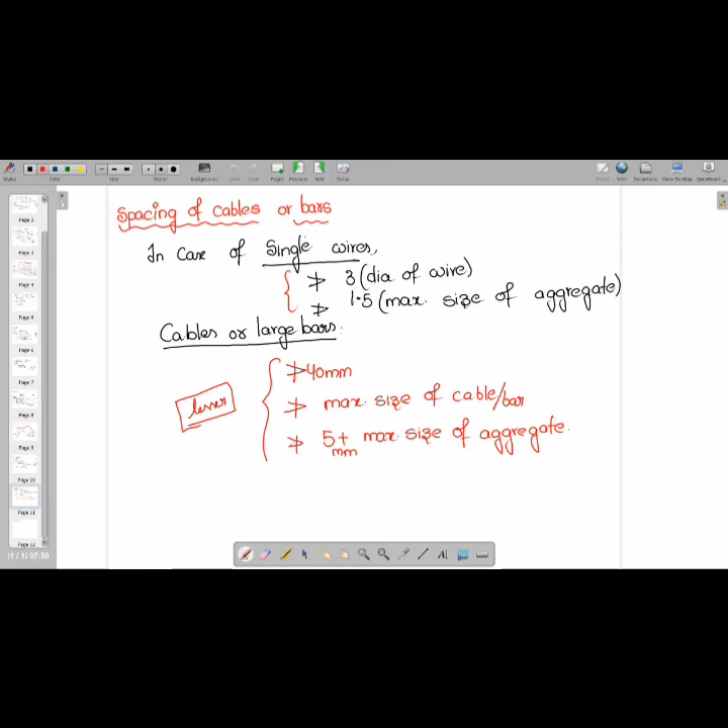Next one we have is breaking of wires. See, when you are performing the tensioning operation, there is some breaking of wires. If more wires are broken, then you have to understand whether the wires you are using are correct or some action should be taken.

So see, students, when I talk about the breaking of wires, here you should write that during tensioning operation, breaking of wires should not exceed 2.5 percent of total wires.

Should not exceed what, sir? 2.5% of wires. Okay. See, students, suppose you are tensioning 100 wires and three wires are breaking, then you have to investigate. You should not leave it like that. Is it a fault in the tensioning operation? Or a fault in the steel? Or in the grade of the steel? Like that, you have to do some investigation.

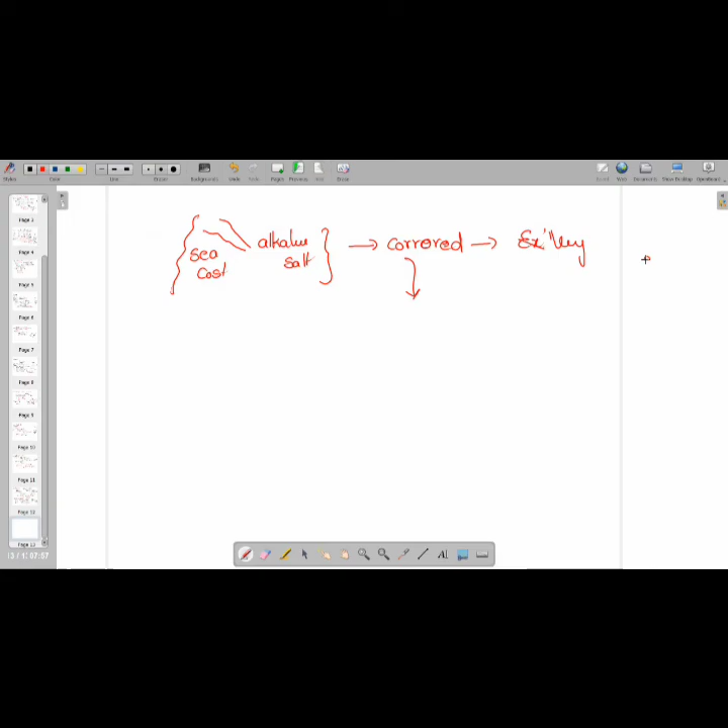In this case, whatever cover you use, suppose if you are using 20 mm minimum cover, in this case you will use some 40 or 50 mm because it's a severe exposure.

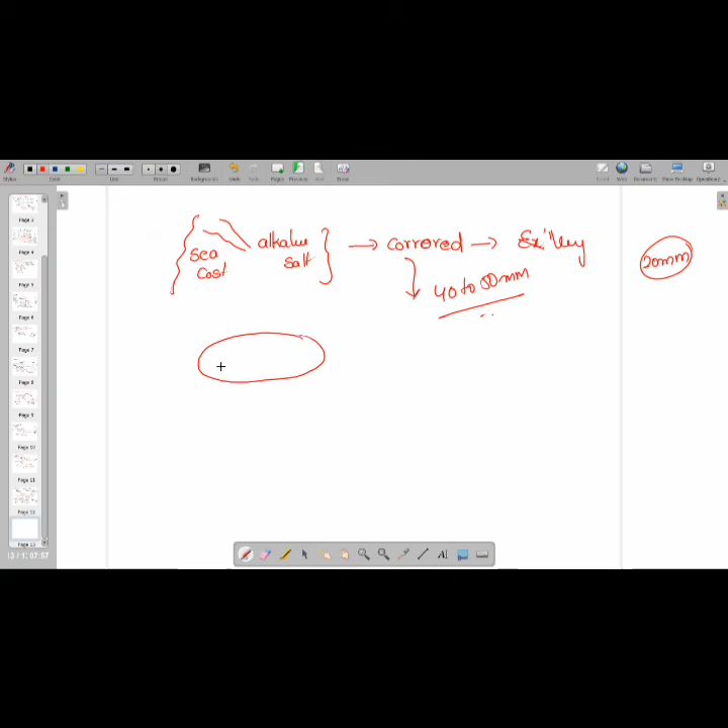Or if you are trying to store oil in a tank, this oil can react with the cement. So here also you will provide more cover with pozzolana cement. So this is what I wanted to tell you.

And here, whatever the spacing, if I talk about spacing in side face reinforcement, the steel bar spacing should not exceed 200 mm. Usually it should not exceed 300, but in case of side face reinforcement, it should not exceed 200 itself.

That's what I wanted to tell you. Imran Loni, did I answer your question, sir? Did I answer your question?

Okay, I'll be sharing with you. And one more thing students, not only RCC, there are three classes. Not only RCC or soil or anything, don't try to read extraordinary syllabus. You are preparing for JE and AE and you cannot read for ESE.